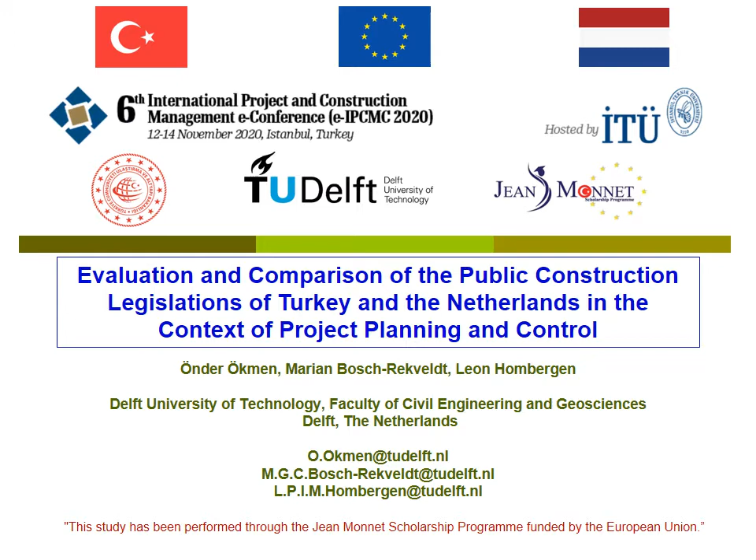Please note that this study focuses on the planning and controlling subject from the legislation perspective.

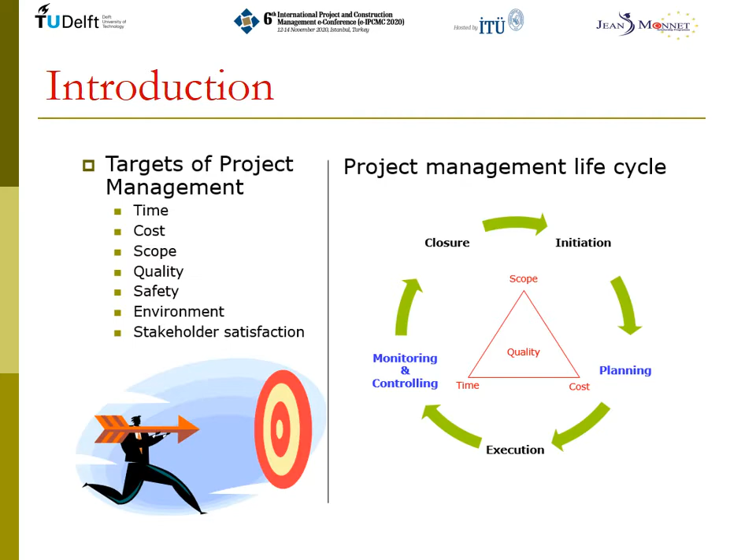Complex, uncertain, and dynamic conditions in today's construction projects require the usage of appropriate planning and control methodologies in order to increase the possibility of achieving success. Particularly, using techniques such as the critical path method, line of balance, linear scheduling, and earned value management seems essential in order to properly manage construction projects.

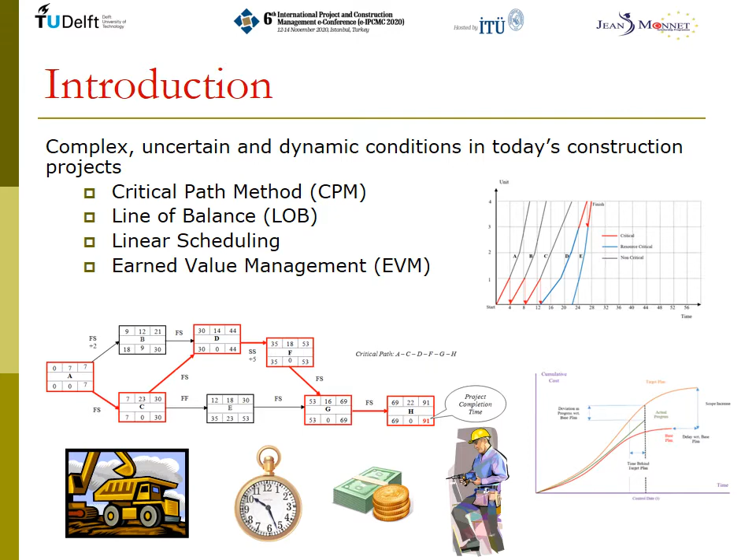Completion of public-owned construction projects successfully is quite important for Turkey as a rapidly developing country. However, schedule delays and budget overruns are frequently encountered in public-owned construction projects in Turkey. One of the causes for these delays and overruns is that projects are started without proper planning and then executed without using advanced project planning and control methods.

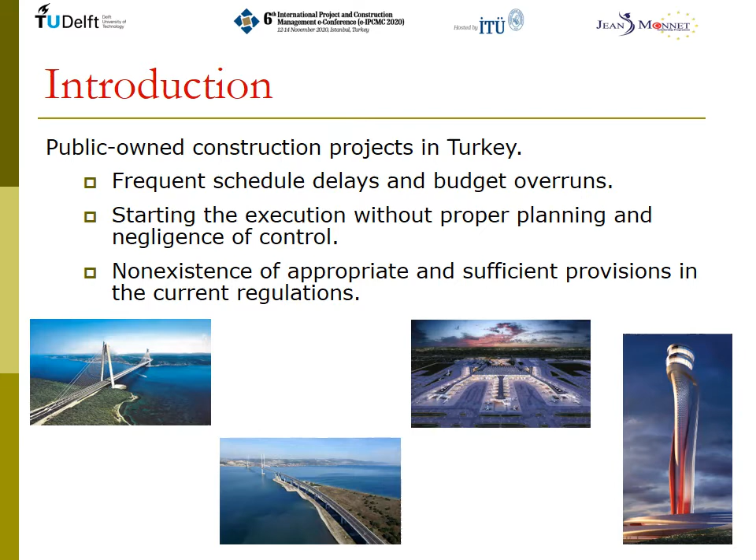Studies conducted on this issue point out the main reasons of this problem being the non-existence of appropriate and sufficient provisions in the current regulations that would enforce the project parties to utilize the required project planning and control methods in their undertakings, and lack of awareness on such methods in the Turkish construction sector.

In Turkey, public institutions which are liable to public law and using public resources are subject to Public Procurement Law 4734 and Public Procurement Contracts Law 4735.

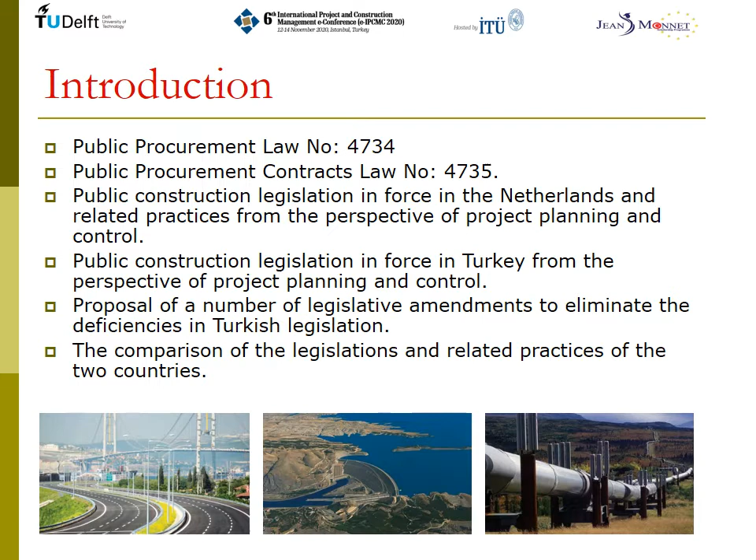In this study, firstly, the public construction legislation in force in the Netherlands and related practices were investigated. Secondly, the public construction legislation in force in Turkey was reviewed to identify deficiencies in the regulations from the perspective of project planning and control. Subsequently, a number of legislative amendments have been proposed to eliminate these deficiencies. Finally, the legislations and related practices of the two countries were compared and conclusions were drawn.

The Netherlands does not have a strictly centralized state tradition. There are 3 levels of independent Dutch governments: one central government based in The Hague, 12 provinces, and 355 municipalities respectively. Furthermore, there is an independent layer of 21 regional water management authorities who deal with the local polder systems, water safety, sewer water treatment, and water quality. All of these Dutch governments have their own jurisdiction, can make their own decisions, and have their own political representatives.

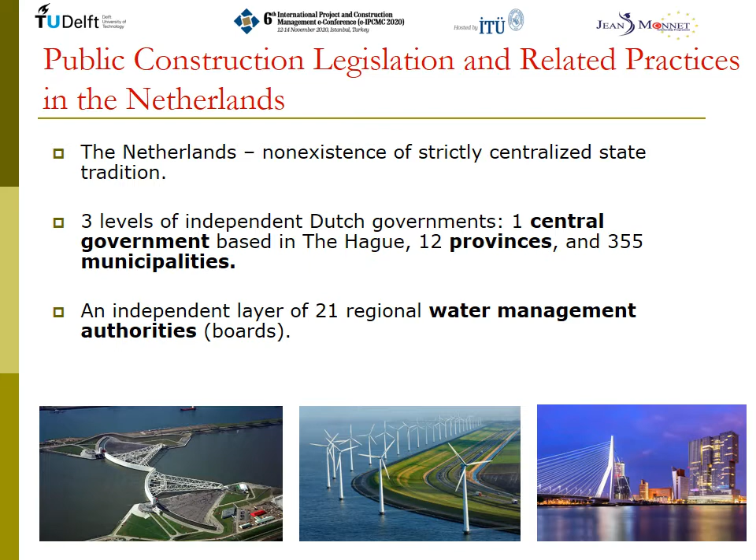Also, for the role as an employer to the civil engineering market, these governmental administrations have their own policies and responsibilities. Only on some issues does the central national government enforce rules by law.

However, in general, the policies and applications of the National Ministry of Infrastructure and Water Management are followed. Rijkswaterstaat is a part of this ministry, being the executive agency that operates and explores the national networks for canals and rivers, highways, and water defense works. ProRail, the public organization that takes care of the national railway network, is a bit more remote and independent from the Ministry of Infrastructure and Water Management, but it also reports to this ministry. On the other hand, the water management authorities, municipalities, and provinces report to their own political representatives and are only supervised by the national government remotely.

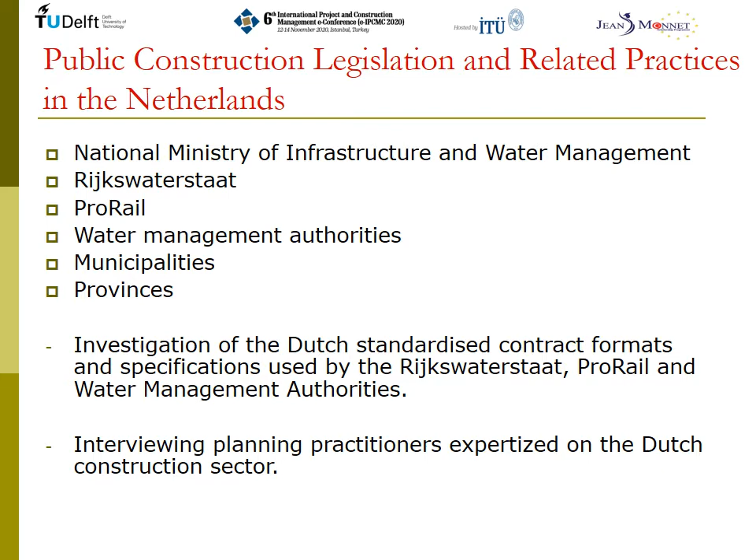In this study, public construction legislation and related practices in the Netherlands have been investigated by gathering and studying the Dutch standardized contract formats and specifications used by the Rijkswaterstaat, ProRail, and water management authorities respectively, and by interviewing planning practitioners expertized on the Dutch construction sector.

The quality control system is the main tool generally utilized in managing the Dutch public construction contracts. The usage of advanced project planning and control procedures in public-owned construction projects is ensured mainly through the adoption of the quality control system, the details of which are determined within the contracts through negotiations conducted between the public owners and contractors.

In general, the details of the requirements regarding project planning and control are already ensured through the quality control system within the contracts. ProRail applies the tightest contractual clauses regarding project planning and control among the owners of the public construction sector of the Netherlands. The requirements are embedded in a general tight level of specifications, along with the safety specifications implemented for all projects in the railway construction sector.

A detailed work breakdown structure is generally required, as well as a probabilistic approach to the planning. Critical path method, linear scheduling method, earned value management, S-curve progress analysis, and Monte Carlo simulation-based scheduling are among the project planning and control methods generally utilized by the contractors in the projects of ProRail.

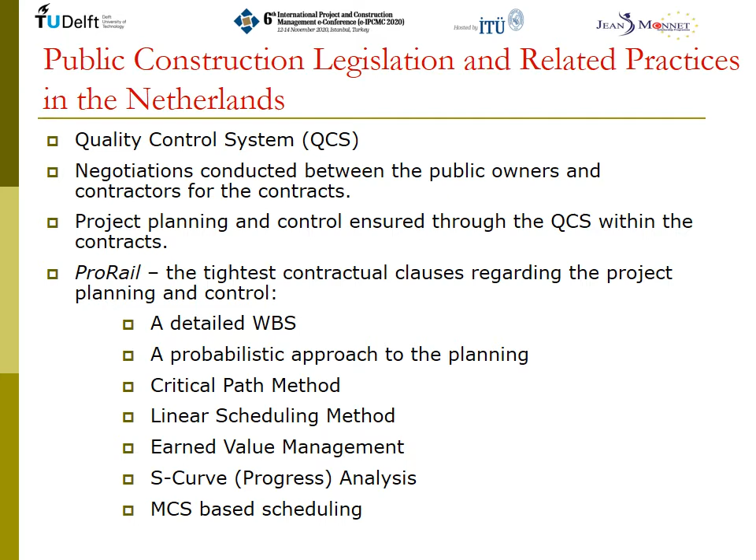After presenting some information about the public construction legislation and related practice in the Netherlands, let's talk about the part of the paper related to Turkey.

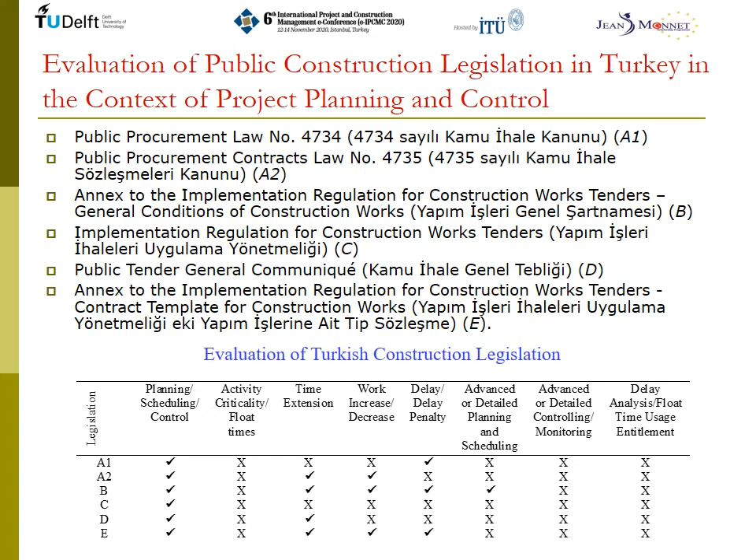In order to eliminate the deficiencies detected in the legislation in terms of project planning and control, a number of legislative amendments have been proposed in this study.

Project management methods taken into account and referred within these amendment proposals are the critical path method, line of balance method, and linear scheduling method as the project planning and scheduling methods; the earned value management and S-curve progress analysis as the project control methods; and time impact analysis as the delay analysis method.

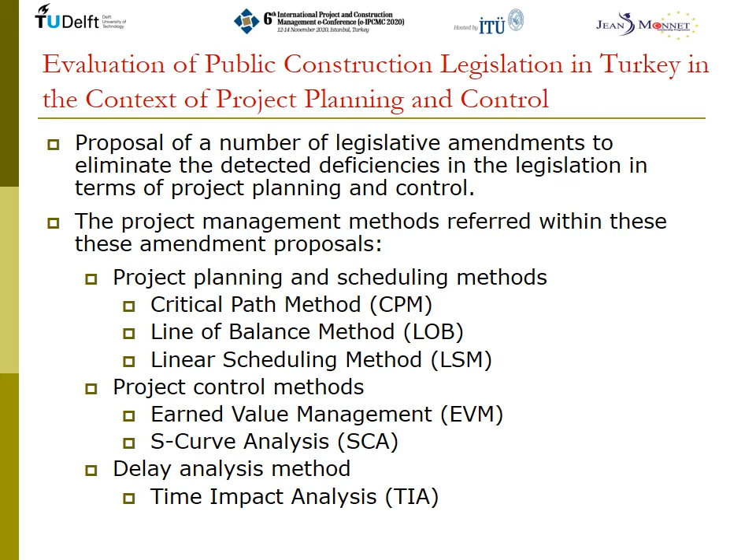The reason for using these methods in the study is that relevant literature extensively states their advantages, features, and effectiveness in construction project management.

In the paper, only 4 of the legislative amendments proposed for the elimination of the deficiencies detected in public construction legislation of Turkey, in the context of project planning and control, have been introduced in detail.

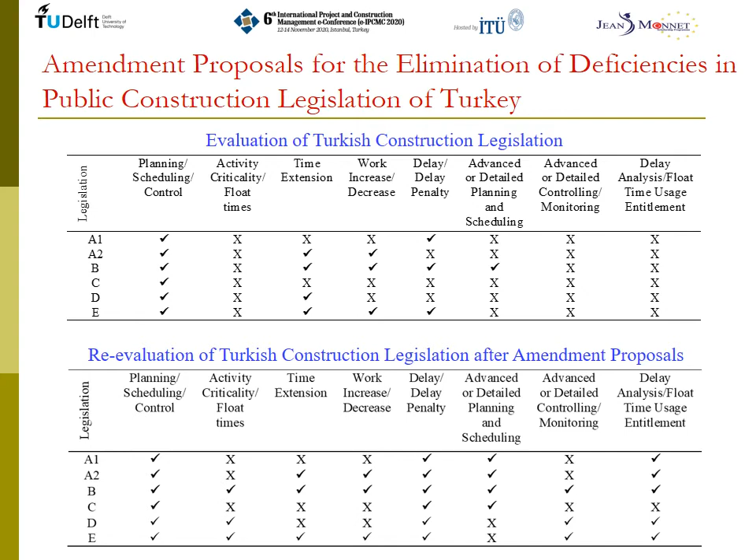This can be considered sufficient criteria to eliminate the legislative deficiencies detected in this study, when the principle of hierarchy of norms of law is taken into account.

In this final part of the presentation, I will summarize the conclusions and findings of the study. Ensuring the usage of advanced project planning and control methods, such as critical path method, linear scheduling method, and earned value management, through legislation emerged as a priority for the public construction sector in Turkey.

This study has revealed that almost no obligation exists in regulations regarding the usage of these methods. This situation yields ineffective project management from the contractor's perspective and ineffective progress monitoring from the owner's viewpoint. In turn, cost overruns and schedule delays frequently occur in public-owned construction projects.

This study aims to create awareness on this issue and introduce an approach that can be followed to resolve this problem. In the Netherlands, the usage of advanced project planning and control procedures in public-owned construction projects is ensured mainly through the adoption of a comprehensive quality control system, the details of which are determined within the contracts through negotiations conducted between the public owners and contractors.

In other words, although the legislative regulations do not contain obligatory terms towards the implementation of advanced project planning and control procedures in the public construction legislation of the Netherlands, similar to the situation in Turkey, the usage of such methods is ensured through the quality control systems applied tightly based on the regulations put into force within the scope of contracts.

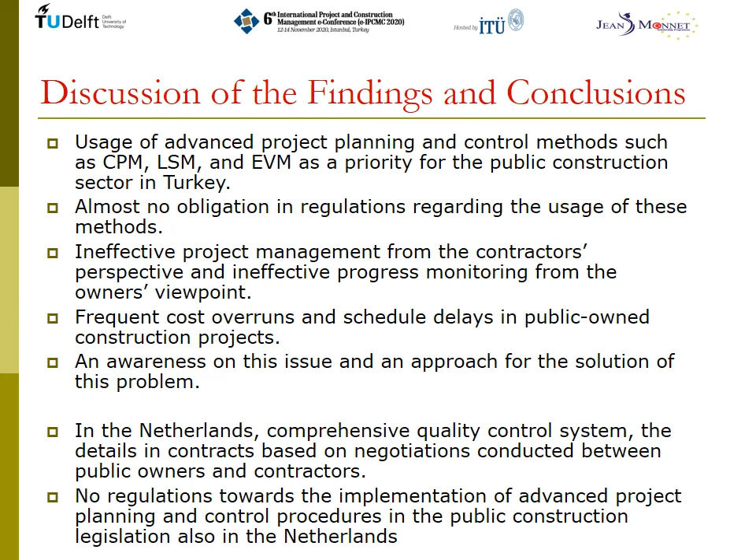All the different cooperation cultures among the public owner organizations in Turkey already provide the conditions for realizing procedures similar to the current practice in the Netherlands. Generalization of the usage of such a model is also possible in Turkey.

Furthermore, it can be argued that legislative amendments similar to the ones proposed in this study may be applicable and required also for the legislation of the Netherlands, to provide a multidimensional solution also to the case of the Netherlands. Obviously, schedule delays and cost overruns in public-owned construction projects also occur in the Netherlands.

Future research could focus not only on the opportunities of legislative amendments in the Netherlands, but also in the other European countries.